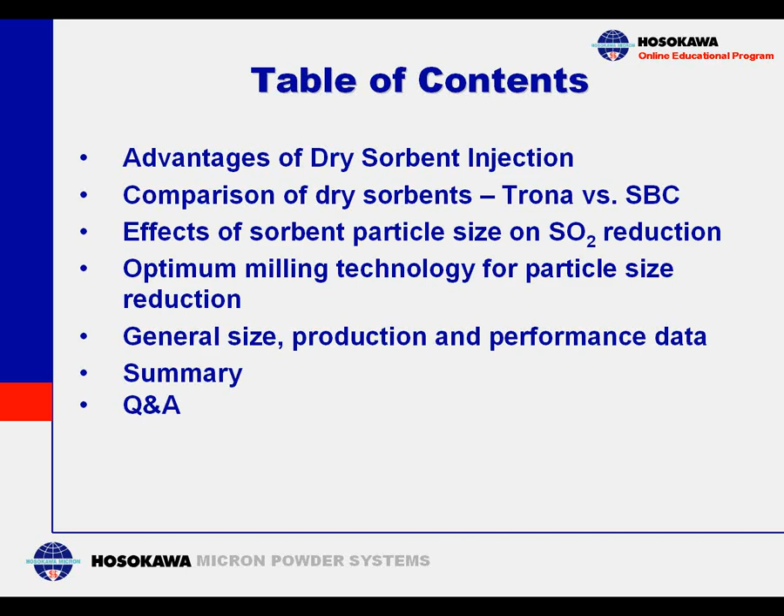Fossil fuels such as coal and oil contain significant amounts of sulfur. When burned, over 95% of the sulfur is more or less converted to sulfur dioxide. Typical applications include utility and industrial boilers, in addition to other types of combustion units such as municipal and medical waste incinerators, cement and lime kilns, metal smelters, petroleum refineries, and glass furnaces.

Flue gas desulfurization is an absorption and reaction process using alkaline reagent to produce a solid compound. It's a technology for removing sulfur dioxide from exhaust flue gases. As you know, sulfur dioxide is a harmful pollutant responsible for acid rain formation.

Flue gas desulfurization technology has been around for approximately 100 years, but over the past couple of decades, U.S. federal and state regulatory agencies have been tightening emission standards. Additional regulations are imminent. We expect to be subject to even further reduction in sulfur dioxide emissions in the upcoming years.

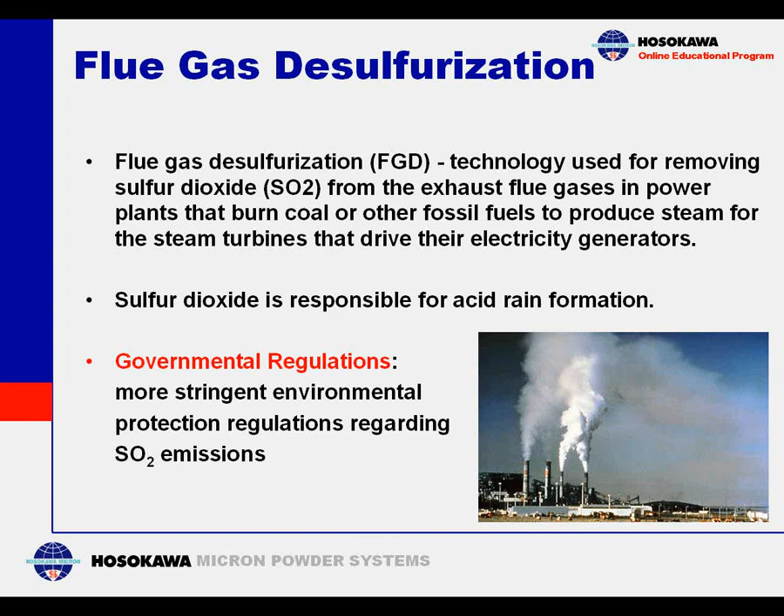At the present time, of the flue gas desulfurization systems in the U.S., approximately 85% of them are wet scrubbing systems. Approximately 10 to 12% are semi-dry or spray-dry systems. And finally, 3 to 5% are dry systems. Typically, the highest sulfur dioxide removal efficiencies can be achieved using wet scrubbing with removal rates greater than 90%.

A dry sorbent injection system, or DSI, is a dry system. It's a process in which a sorbent is pneumatically injected into the furnace or downstream ducting. The dry waste product is removed using particulate control, such as an electrostatic precipitator or baghouse.

So that raises the question, why dry sorbent injection? Well, first, the capital cost of wet scrubbers and semi-dry systems are much higher, as well as perhaps the operating costs. In addition, these types of systems, being wet scrubbers and semi-dry systems, take up much more space.

Traditionally, dry sorbent injection systems can achieve removal efficiency as high as about 80%. However, for quite a number of more recent smaller industrial applications, we can expect removal efficiencies of greater than 90%. And also, with further adjustments to the process, higher removal efficiencies can be achieved with even less reagent.

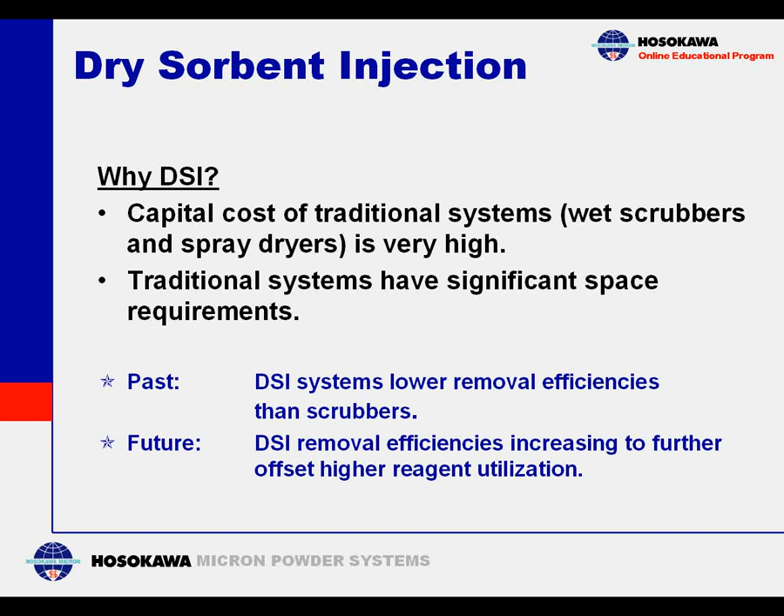With respect to dry sorbent injection systems, there are two primary sorbents utilized: sodium sesquicarbonate, or Trona, as well as sodium bicarbonate.

Trona is a mineral, a mine material. It's a natural form of sodium sesquicarbonate, with the primary formation located in Green River, Wyoming, though there is another location in the United States. Sodium bicarbonate, on the other hand, is a chemical compound or salt, primarily manufactured using the Solvay process. This salt is obtained from a reaction of calcium carbonate, sodium chloride, ammonia, and carbon dioxide in water.

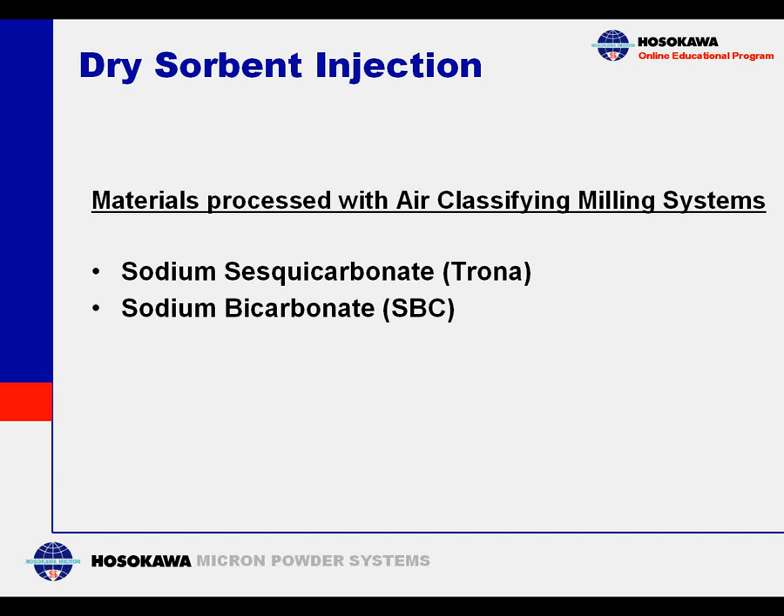There are several notable differences between these materials. For one, sodium bicarbonate is simply more effective for sulfur dioxide emissions than Trona is. Hence, less sodium bicarbonate could be required for an equivalent removal. However, sodium bicarbonate is much more expensive in the United States.

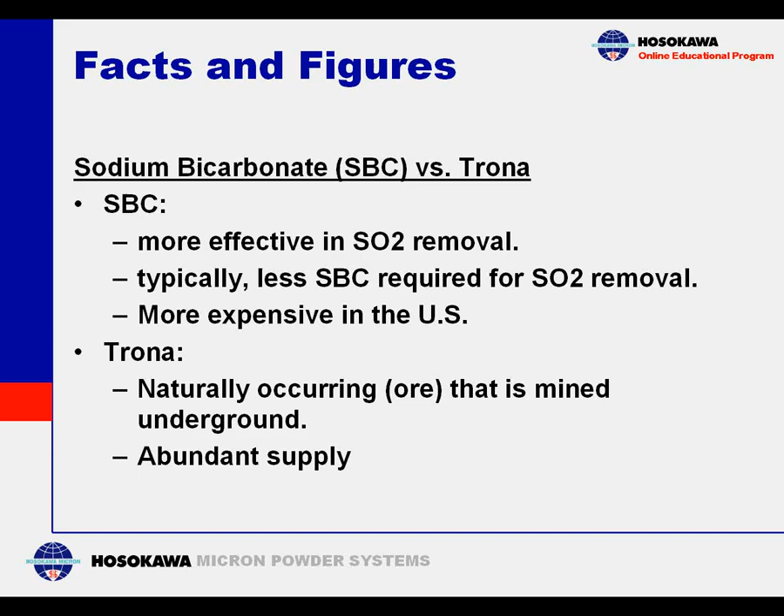For Trona, as mentioned previously, this is a naturally occurring mineral with a vast formation in the United States, so there is by far an abundant supply here. However, for plants outside the United States, logistical costs may prohibit its use, despite the fact that Trona is approximately half the cost of sodium bicarbonate for a wide range of sizes.

The effectiveness of sulfur dioxide reduction is based on the following factors. Please note these factors are not ranked from highest to lowest contribution.

First, sorbent injection rate, and sorbent residence time in the flue gas stream. Second, sorbent penetration and mixing with flue gas. Third, the particulate control device, such as a baghouse or electrostatic precipitator. Fourth, flue gas temperature. And finally, the primary focus of this webinar, sorbent particle size.

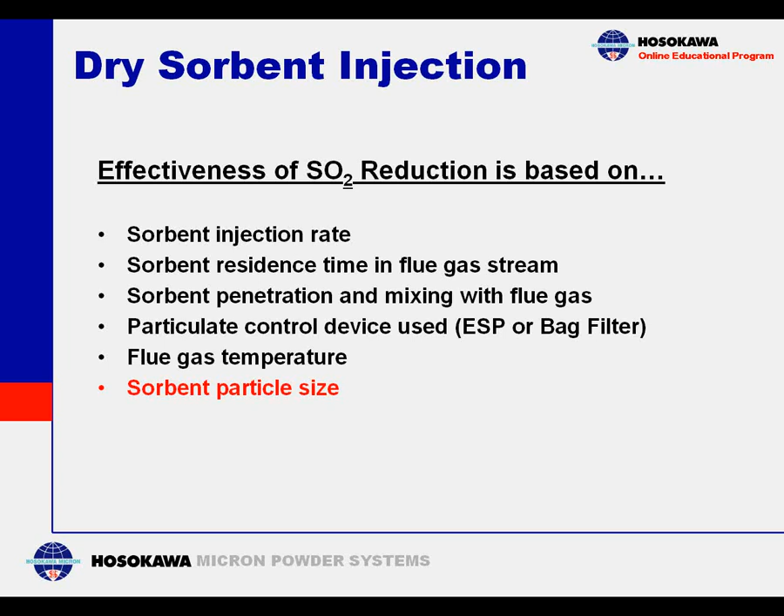Please refer to the graph, which shows the correlation or effect sorbent particle size has on sulfur dioxide removal efficiency. This graph is based on data compiled from a multitude of lab tests, in addition to real-life actual results and feedback from our customers utilizing air classifying milling technology.

On the x-axis is particle size, referred to by the term D90, which is the size expressed in microns at which 90% of the particles are finer than. On the y-axis is sulfur dioxide removal efficiency.

As you can see from the data here, as the particle size distribution becomes finer, for example from 100 down to 20 microns, the sulfur dioxide removal efficiency increases. Traditionally, power plants have utilized coarser grades of sorbent, perhaps in the D90 range of between 75 and 100 microns. For these applications, removal efficiency is low compared to other types of flue gas desulfurization systems.

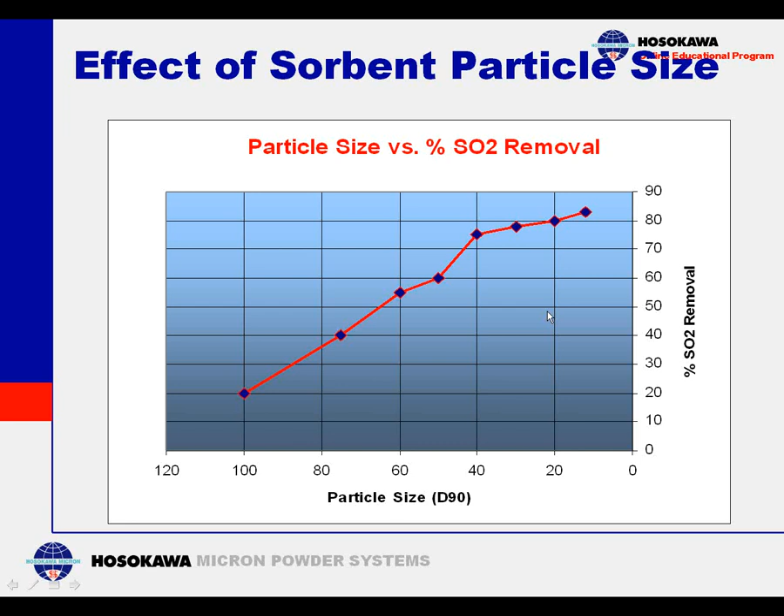However, when injecting finer sorbents, let's say in the range of 20 to 30 microns with respect to D90, removal efficiencies approach alternate technology results.

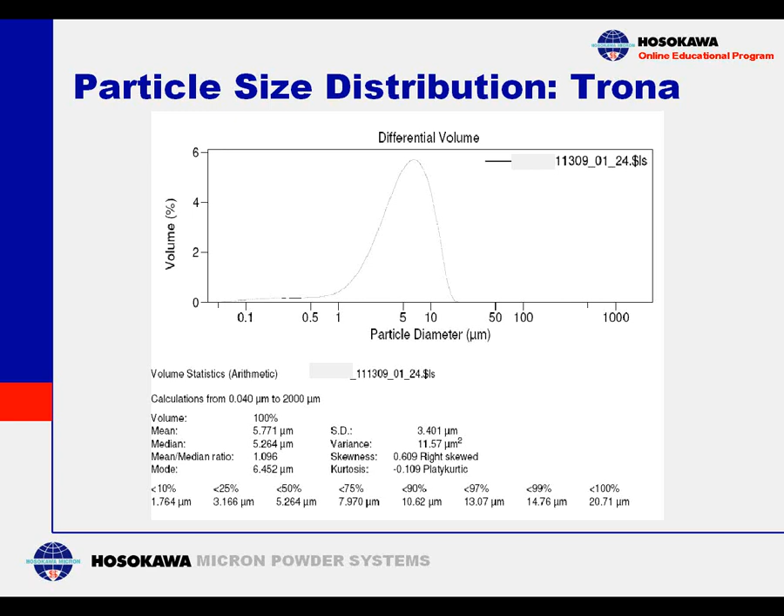Please note, this is a typical curve or profile generated by an air classifying mill. Note the very steep coarse tail here - this is a feature of the air classifying mill. By utilizing an internal dynamic classifier to control particle top size, a narrow particle size distribution can be achieved.

The next graph shows the effect of particle size on energy requirement. In other words, the relationship between particle size - in this case, instead of D90, I have here plotted D50, or median size - versus the capacity of a typical air classifying mill.

For this plot, we have selected a pilot size air classifying mill employing a 15 horsepower main grinding motor. This graph more or less shows the full workable range of an air classifying mill, down to approximately a median size of around 5 microns and upwards to a median size of, let's say, the 30 to 35 micron range.

For dry sorbent injection applications utilizing an air classifying mill, most common particle size ranges are in the 10 to 20 micron D50, or median, size range. However, in recent years, there has been an increase in demand for even finer grades of sorbents, from a D50 of around 5 microns to perhaps 8, 9, 10 microns in range.

In the case of the particle size distribution outlined in the previous slide, with a median of 5.2 microns, utilizing a 15 horsepower mill we can achieve on average about 100 to 120 pounds per hour. However, if trying to achieve a 15 micron D50, the output increases substantially, from around 100 pounds per hour and upwards of 750 pounds per hour.

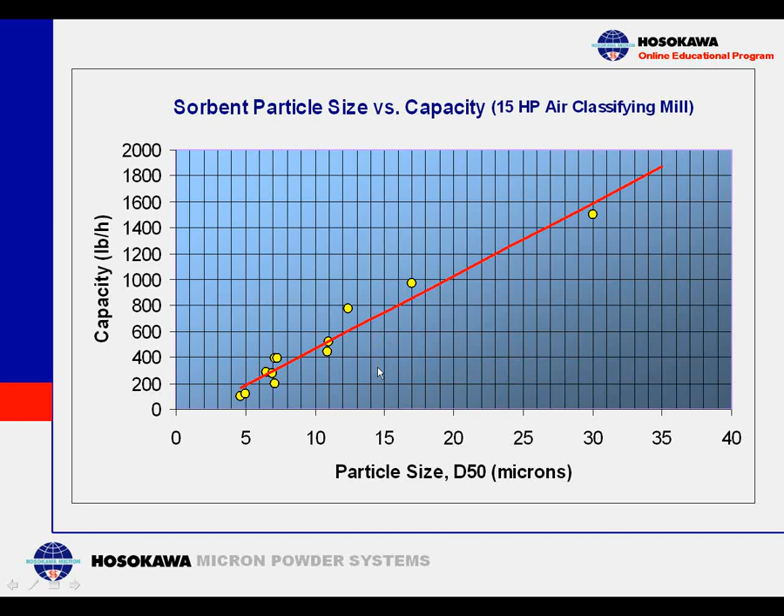This table is more or less a quick reference chart to determine air classifier mill size for a particular capacity requirement for two common sorbent particle sizes. What I've shown here are two different D90s, a D90 of 20 microns and also a D90 of 30 microns. The column on the left shows common production size air classifying mills, from 30 horsepower upwards of 350 horsepower. The rates shown on this table are nominal rates for Trona and are expressed in pounds per hour.

Again, on this chart you can see the effect of particle size on mill size for a given capacity requirement. A 20 micron median sized sorbent requires almost double the energy of a standard 30 micron product. While a finer sorbent particle size increases sulfur dioxide removal efficiency, it is done so at a cost. You'll need less 20 micron product than 30 micron product to remove a given percent of sulfur dioxide, but the energy requirement is higher to do so. So there does exist a trade-off between particle size, the amount of material required, hence material costs, and operating costs.

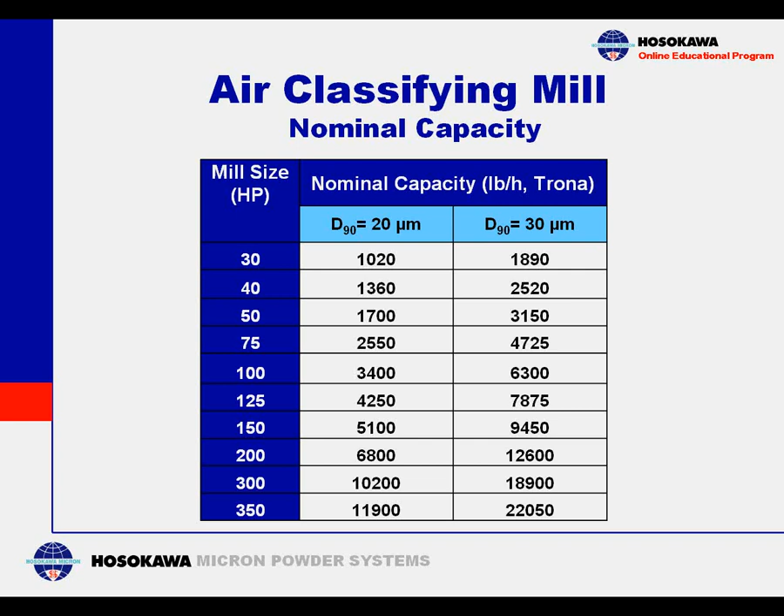Pictured here are two common air classifier mills. The image on the left is a 300 horsepower mill with an independently driven classifier wheel, sized at 50 horsepower. Nominal rates are approximately 5,000 and upwards of 20,000 pounds per hour, depending on the particle size requirement of the sorbent. This particular mill, dimensionally, is approximately 4 meters by 1.5 meters by about 3.5 meters tall, and weighs in excess of 8,000 kilograms.

Nominal airflow range for this size mill is about 15,000 standard cubic feet per minute, or in other words, about 25,000 cubic meters per hour.

The image on the right shows a 75 horsepower air classifying mill. This particular mill has a classifier wheel that is driven on the same shaft as the rotor. This size mill can achieve rates in the range of about 400 pounds per hour and upwards of 3,000 pounds per hour, again depending on the particle size requirement of the sorbent. This mill dimensionally is about 2 meters by 1 meter footprint, and approximately 1.8 meters tall, weighing in excess of 2,000 kilograms.

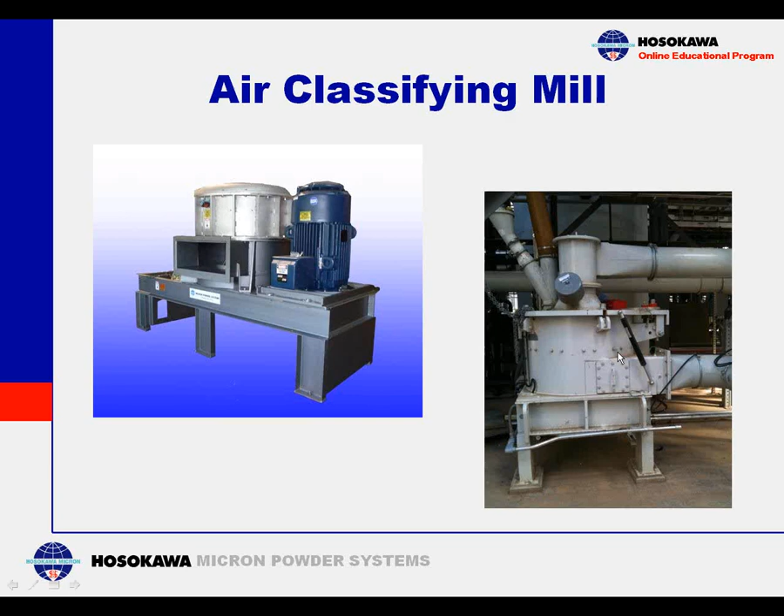The nominal flow rate for this particular mill is about 3,000 standard cubic feet per minute, or almost 5,000 cubic meters per hour.

Facts and features of a typical air classifying mill include high tip speeds in the range of approximately 115 meters per second, or about 23,000 feet per minute.

The mills are equipped with an internal dynamic classifier wheel, shown here. This classifier wheel for the air classifying mill controls the top particle size.

There are two designs of an air classifying mill: one including an independently driven classifier wheel, as in the previous slide, the image on the left, using a separate separator or classifier motor; and one with the classifier wheel driven on one common shaft with a grinding rotor, which in the previous slide was the smaller mill on the right side. This design can be determined based on testing or based on customer requirements.

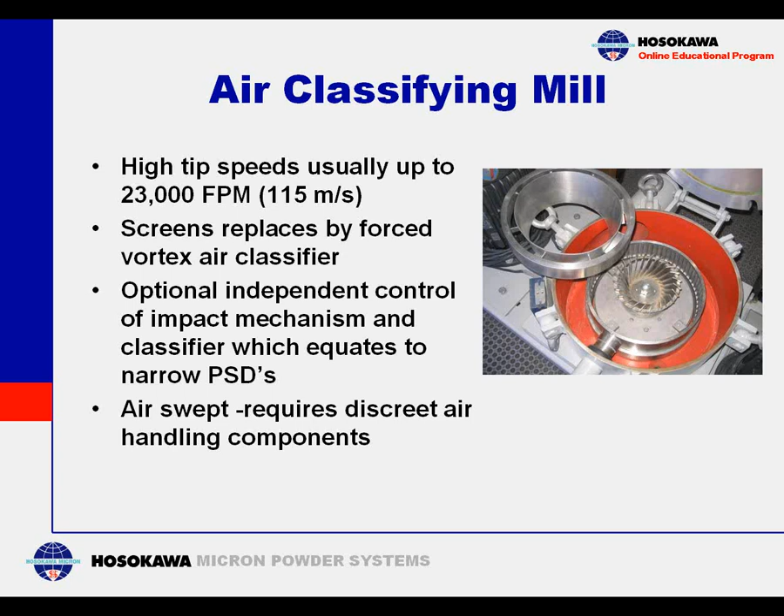One other important feature to note is that, as the name suggests, this is an air-swept mill. Airflow is an extremely important parameter which affects size reduction and classification efficiency. It not only affects size and efficiency, but also serves to cool the material being processed. The amount of airflow per given grinding rotor size, compared to, say, a pin mill, is higher, so there is a natural cooling effect, hence a lower product outlet temperature could be achieved with this type of mill.

This next slide shows a flow pattern in a typical air classifying mill. The main principle of this mill type is to air convey the material to the mill, classify the product into a fine and coarse set of fractions, convey the fines out of the mill, and return the coarse fraction to the grinding zone for further size reduction. This process is repeated continuously, and the unique feature of this type of mill is that the classification step takes place inside the mill and is not a separate or external operation, as in a pin mill, for example. This design also allows these mills to be relatively compact and small in size.

The main airflow is introduced underneath this rotor disc, coming in below it. Here we see the rotor disc, with bar-type hammers or beaters. Material is introduced into the grinding zone right at this point, at the path of the hammers.

The particles are impacted by these rotating hammers. Processed material is then carried by the airstream to the classification zone, located right here.

Correctly sized material, fine enough, passes through the classifier wheel, exits, and gets conveyed to the material handling fan. Oversized material is rejected, drops down in the center of the mill, and is forced out due to centrifugal force, redirected to the grinding zone for recycle grinding. The grinding and classification zones are normally separated by a shroud and baffle assembly, shown here.

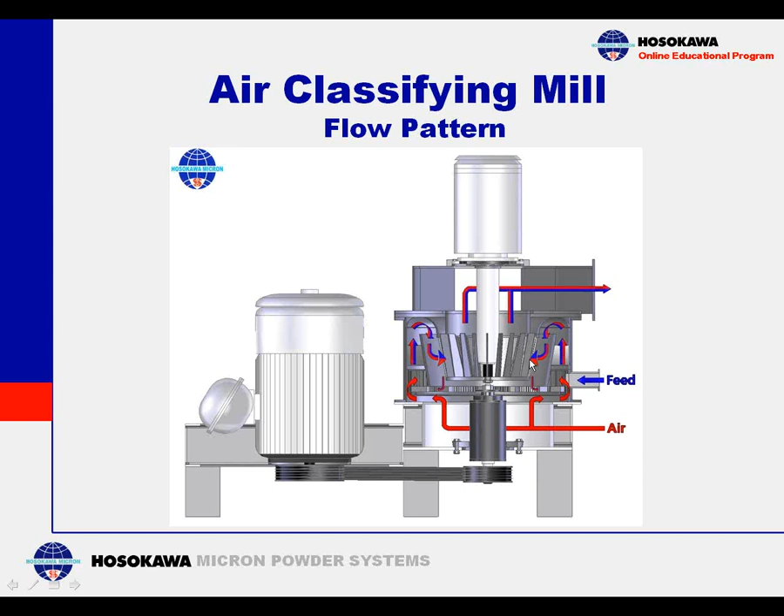Next, we have a schematic of a typical air classifying milling system used in dry sorbent injection systems. Here I've highlighted the air classifying mill in this process. Feed material is transported via rail car or truck to one or a series of feed silos. The feedstock is then metered into the mill, shown here.

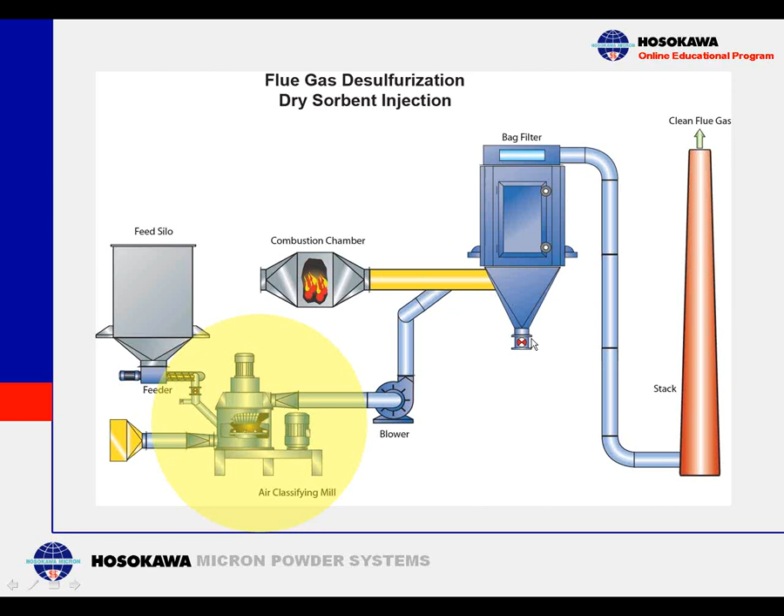The ground sorbent, done in the air classifying mill, has its fine particles conveyed through a material handling fan, shown here. The ground sorbent is conveyed by this material handling fan into the duct between the combustion chamber and the bag filter. The solids are then removed at the discharge of the bag filter, while the clean gas is emitted through the stack.

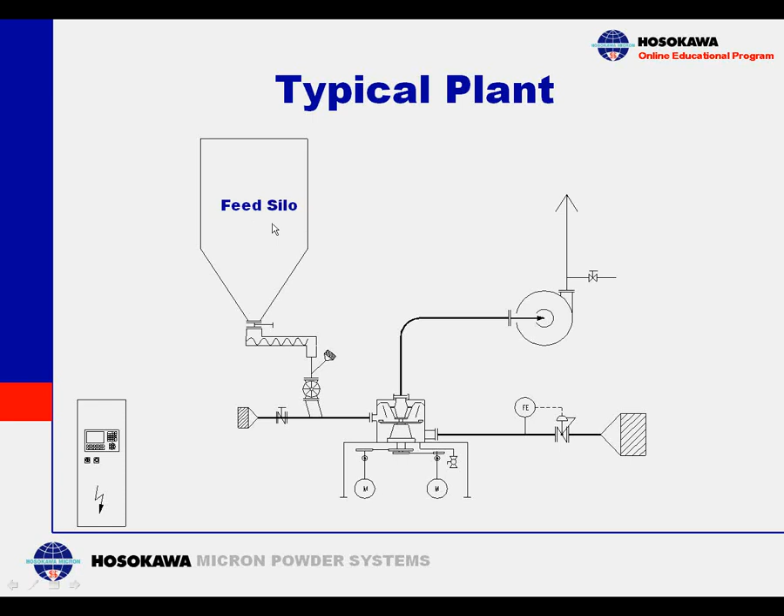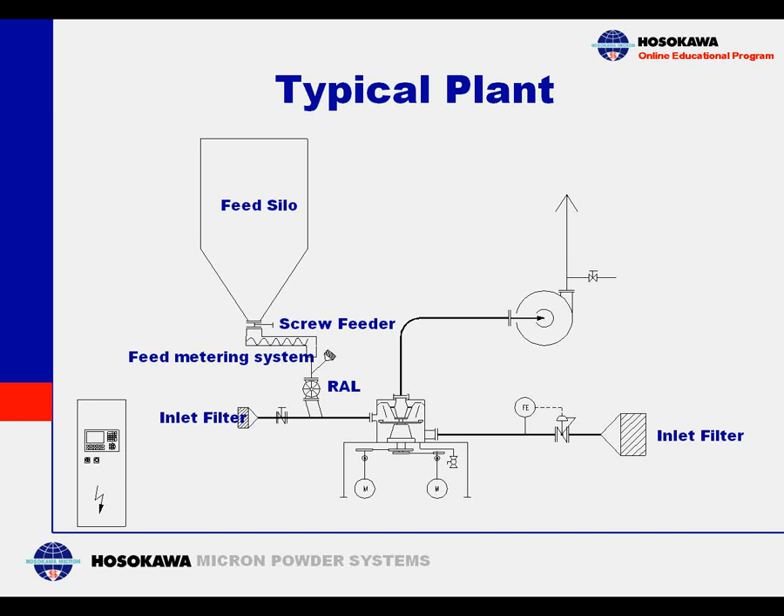Here's another flow diagram. The feed silo holds a campaign of feed material. The feed system typically consists of a screw conveyor or screw feeder, which meters the material into the air classifying mill, in addition to a rotary airlock, which serves as a suction pressure isolator. Air filters are often utilized to keep out contaminants.

Next, we have the air classifying mill, which is the size reduction device for the dry sorbent. As mentioned, the ground product from the air classifying mill is pneumatically conveyed to the material handling fan, and from that point on, conveyed via positive pressure to the bag filter and ultimately to the stack, where clean gas is emitted through the exhaust stack. There is, of course, a control system to ensure proper operation, sequencing, and alarm management.

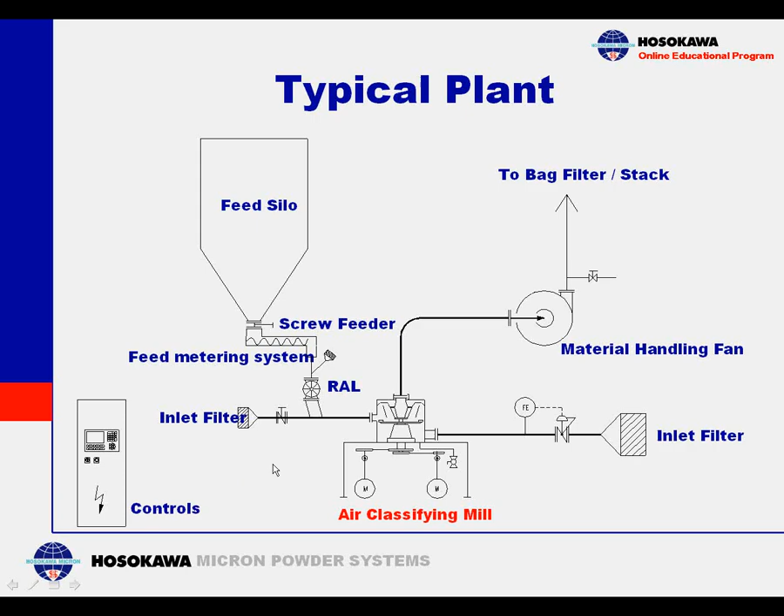So again, noting here, what we're showing is the rotary airlock, which is your pressure or suction isolator, your feed pipe to the air classifying mill, the discharge pipe to the material handling fan, and then ultimately out to the bag filter, followed by the exhaust stack.

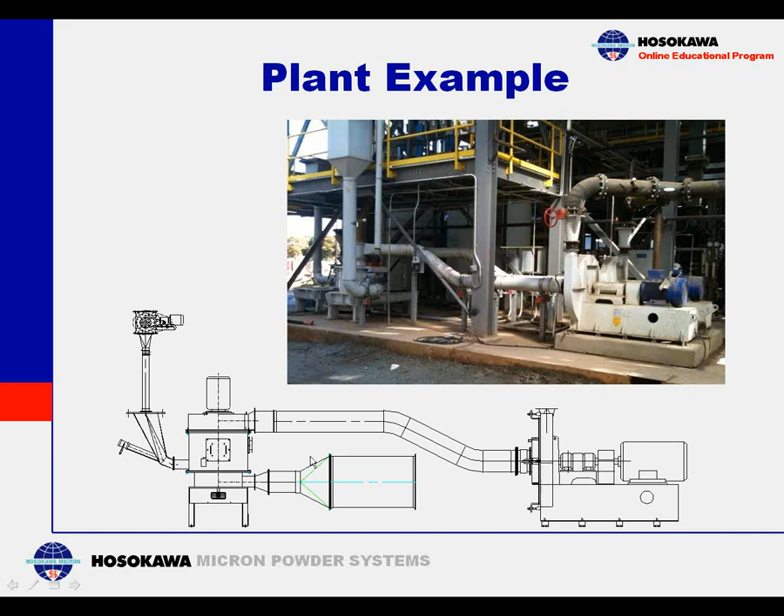Again, this is a common system, a common size reduction system for processing of sodium bicarbonate or Trona.

In summary, government regulations are forcing lower and lower emission standards. Dry sorbent injection may be a lower capital cost alternative for sulfur dioxide reduction. The reagent particle size greatly affects sulfur dioxide removal efficiency. Utilizing finer size sorbents may drive capital as well as material costs even lower, provided less quantities of sorbent would be required to meet removal efficiency.

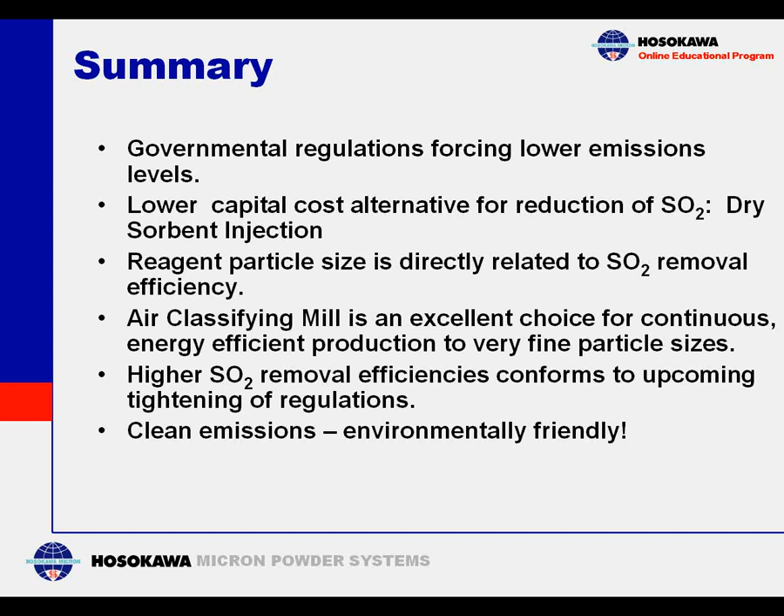An air classifying mill is by far an excellent choice for continuous, energy-efficient production to very fine particle sizes, and hence higher removal efficiencies. Higher sulfur dioxide removal efficiencies go hand in hand with further tightening of emission standards. And finally, cleaner emissions obviously protect our environment. Thank you very much for your time and attention.